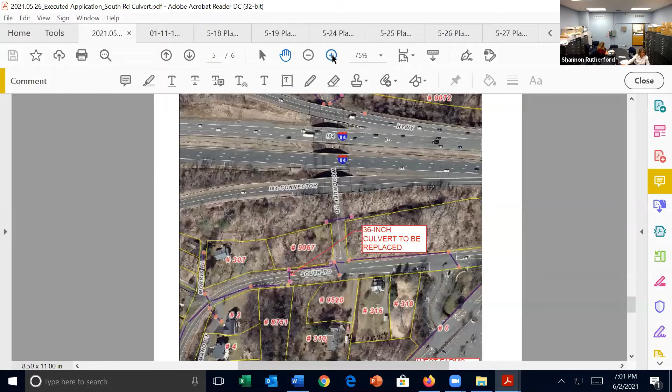I think that's what you have up on the screen right now. It is, and we have our Director of Public Works, Russ Arnold, on the line with us. Russ, if you want to do a full overview for the commission, I can start with the aerial and then move to the plan at your request. Just let me know. Okay, great.

Thanks, Shannon. Good evening, everybody. As Shannon said, I'm Russ Arnold, Director of Public Works, Town Engineer for the town. We're here tonight to talk to you and explain why we have to replace the 36-inch culvert under South Road near Woodruff.

A little history: back in 2010, the Inland Wetlands Planning and Zoning, when it was combined, approved a plan on lot number 9067 for West Farms Mall, which basically revamped the wetlands at that time. They did a whole planting plan, regrading, and we worked with Malone & MacBroom at the time, who was the designer for that wetland recreation and improvement project. We agreed then to replace the culvert and got permission and approval from the commission to replace it. However, it was a big job, a lot of money, and the culvert was in good shape then—it didn't really need the replacement at that time.

So we're here now. The bottom of the culvert has started to erode, and we've lost about 20% of the bottom of the invert at this point. So instead of having an emergency situation, we're here before you to get permission to replace the culvert. We're replacing it with a 36-inch pipe. We're not changing anything, pretty much keeping the same elevation.

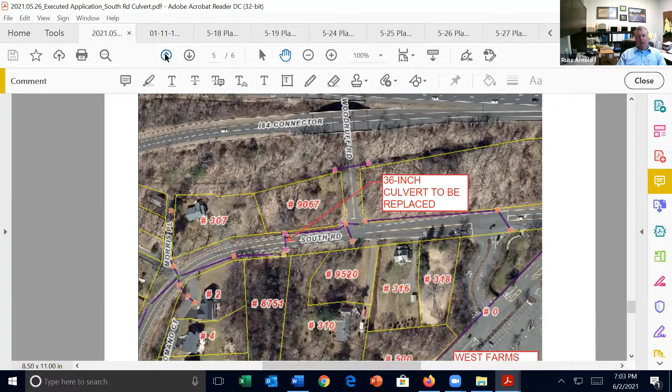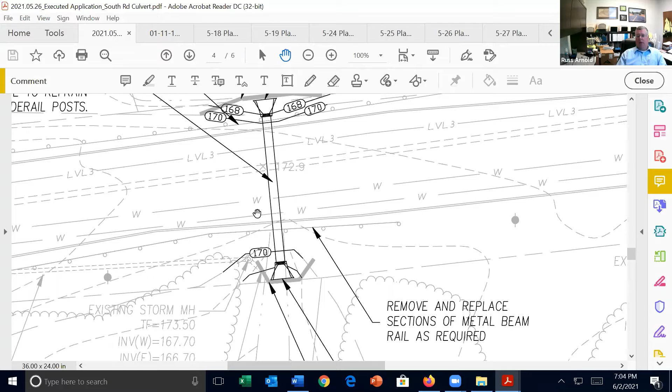We are governed by 3 different utilities. There is a Level 3 communication line that goes over the pipe, as Shannon shows you right there. Below the pipe, we have an 8-inch sanitary sewer with a 6-inch force main that comes from West Farms Mall, put in in '95. Further south, we have a 12-inch water main that goes underneath the pipe, offset underneath our storm culvert. So we really can't lower the pipe or change the elevation too much.

The inlet and outlet run from the outlet all the way down to Hartford Road, Route 171—it's basically about 2,400 feet, with about 3 feet of grade change. The mall years ago went in and cleaned that all out, so it's flowing. So we can't change any elevations; we're governed basically by the outlet and the utilities that are installed now.

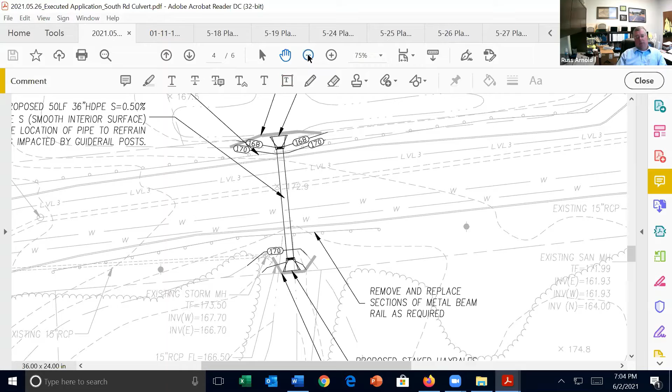We will dewater. Since the roadway carries a lot of traffic to the mall, and the mall's getting back up and open from COVID, we don't want to disrupt that during the day, so we're going to do this work at night. We put out some bids, and we're going to have a contractor with a bigger excavator come in to replace the pipe, along with a crew.

We will dewater prior to construction—during the day our dewatering will involve putting a pipe in on the inlet side, stoning all around it, and dewatering down the pipe itself. We're going to have to dewater during our construction operation because it's a huge wetland with wetland material, and the soil doesn't drain well, so we'll dewater during the operation.

Talking with the 3 different contractors, everyone—myself included—believes we can get this done in one night. We'll pave it the next day with another crew.

Shannon, I'm at a loss—what are we going to put in for our outlet and erosion control? We're going to do hay bales, and if needed, straw wattle here at the outlet. And with the dewatering, we'll use a filter bag. Exactly, thank you.

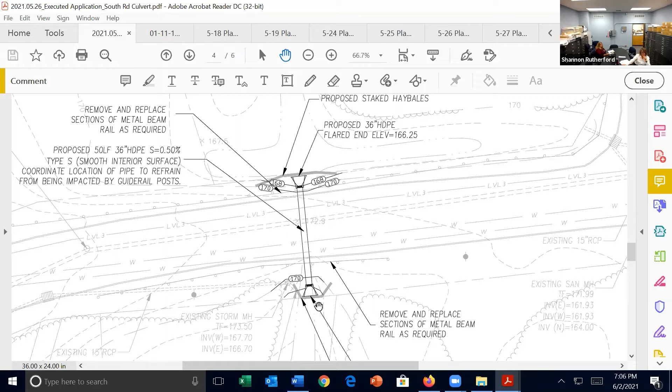And that's pretty much all I have. We're replacing in kind. We've run the drainage calcs back in 2010. There's no reason to upsize the pipe at all. It handles the flow adequately. There's no overtopping, no issues of flooding. It is just a very flat area.

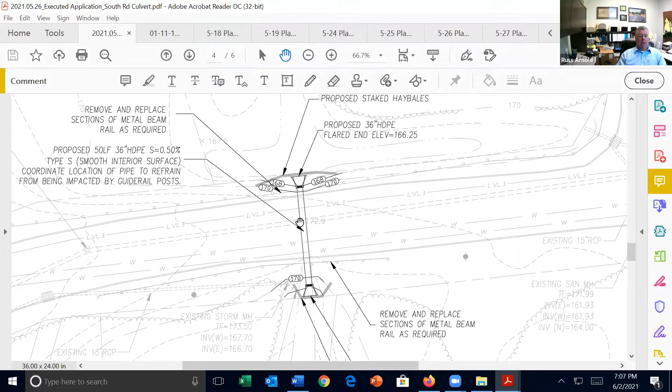This culvert drains from the north side of 84. There's a big wetland on the other side that drains through and under 84 in a 48-inch culvert, about 300 feet east of Woodruff, and that all drains down through this area as well.

So with that, I will open up if anybody has any questions. I'd be more than glad to answer anything.

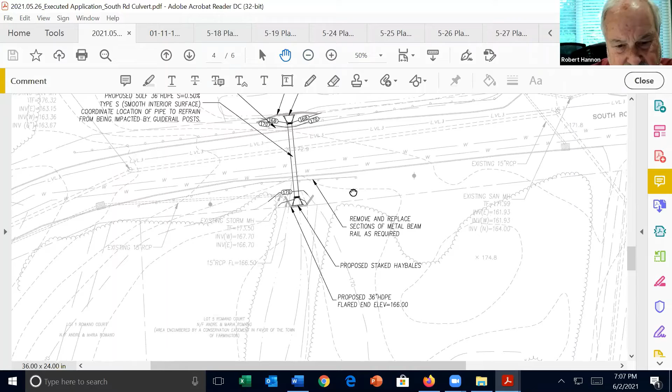Shannon, can you raise the pipe up a little? I just wanted to double check the elevation at the bottom and the top. So there's only a 0.25 foot difference in elevation. Okay.

Rich, I'll start with you. Any questions? No, it looks like pretty much maintenance work.

I did see some excavation that had gone on the south side of that culvert when I was driving by. What was that? Oh, we removed a couple of fallen trees that had fallen down across the brook, and what we were doing is cleaning out the culvert itself because we thought it was plugged up a little bit. But we found that the bottom has basically rotted out. So that's what we were doing there, removing the trees that had fallen into the outlet side.

That's all I have. Okay, thanks, Rich.

Emily? I have no questions. This sounds like action that's needed to stave off further, much larger problems. So there we have it.

Okay, thank you. Dave? No questions. Robert? No questions. Agree that it's routine maintenance, and doing the work will actually minimize the impact on the road. So Russ and Shannon, you are more than capable of pulling off the project. Keep up the communication. That's it.

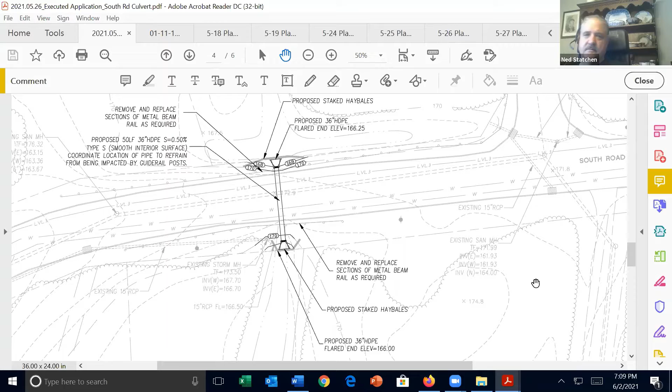Yeah, it seems like necessary work. I don't see any problems. Okay, thanks. Jay? No questions. I agree with everyone else. It looks like just normal maintenance work.

Yeah, Russ, I do have one question. If you guys have been out there, have you seen any evidence of any scouring or anything like that? I know it's a pretty shallow grade, but I'm just curious.

Yeah, no scouring at all. And Rob, basically the reason there isn't any, it's so flat, the water doesn't have any chance to pick up any velocity. Okay.

It's a good thing and a bad thing to be that flat, because we've got to de-water for a long period of time just to get it down, so we don't have a problem when we're excavating. But it's pretty much an ideal situation as far as flow goes.

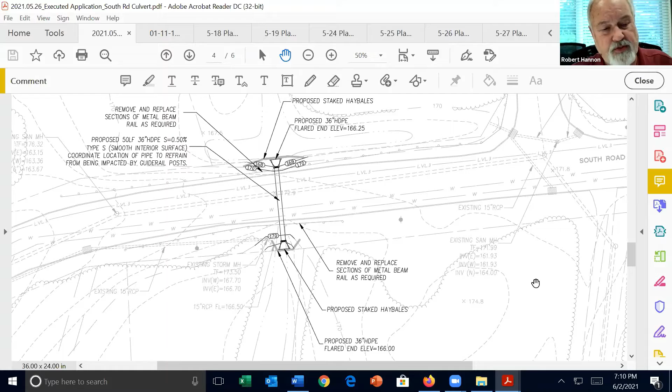Okay, no, because if you saw any evidence of any type of erosion or scouring, I think we probably would have asked to go ahead and take care of that when you put the pipe in, but if there isn't anything, it doesn't sound like it's much that we're going to have to really worry about.

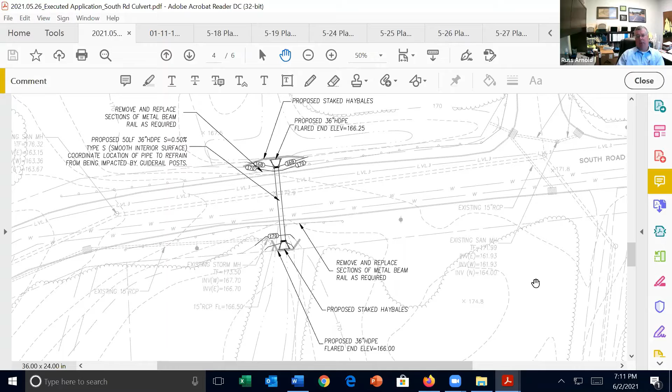Now, one thing we plan on doing, Bob, is we're going to put some riprap in anyway, just to create that plunge pool, just to have it for future maintenance standpoint. Okay, well, it sounds good.

I don't have anything else. So Shannon, on this, we just need a motion to accept the application. Correct. Okay, so would somebody care to make that motion? So moved. Second by Robert.

Okay, any questions, comments? I think everybody's opinion was pretty clear, so speak now if you have anything. If not, we'll go ahead and take a vote. So all those in favor of accepting the application, please say aye. Aye. Aye. Opposed, abstaining? Okay.

And I guess we'll see you in 2 weeks. So I'm going to assume there's no site walk needed. I doubt that it would. I mean, just replacing in kind. I don't think it's really needed.

Any chance the commission would like to entertain a motion with respect to significance then, as both Mr. Arnold and I will be previously occupied at another commitment in 2 weeks. Well, based on comments I heard earlier about this being pretty much routine maintenance, I would say it's not significant, but if somebody cares to make that motion, it would be appreciated.

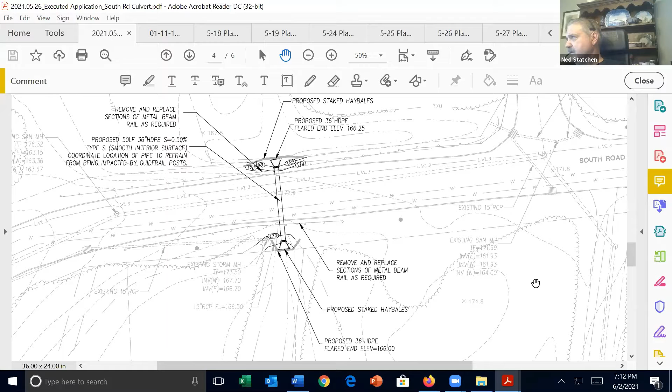I'll make a motion since it's a replacement of the pipe of the same size and basically the same kind, that this is a non-significant event. Is there a second?

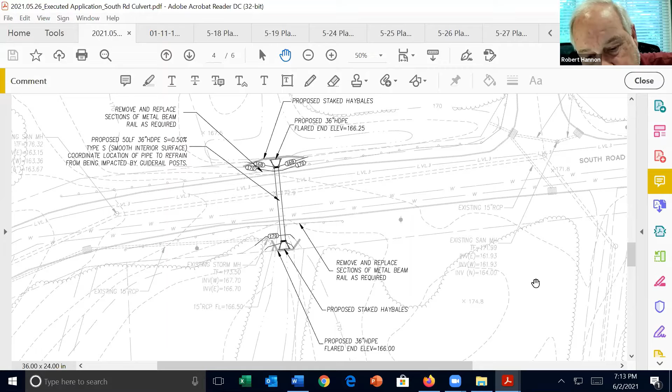And seeing as how people were pretty clear about how they felt, I'm just going to go to the vote. So those in favor, if this is not a significant activity, please signify by saying aye. Aye. Opposed, abstaining. Okay, perfect, thank you.

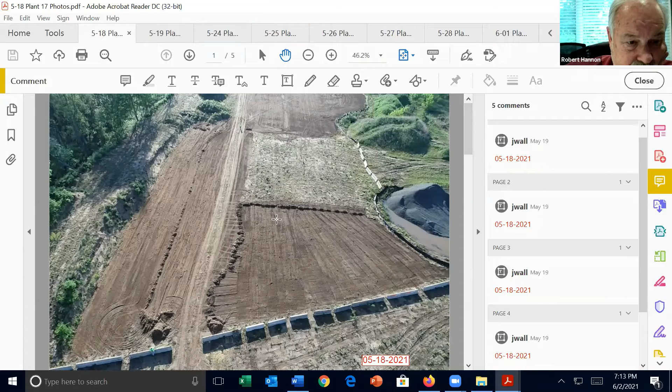Next up is plant 17, 1179 Farmington Avenue, an update. And so we've got photos, and I believe I saw Attorney Galsky on, is that correct? Yes, I'm here with Mr. Majewski. Oh, perfect. So Attorney Galsky, if it's all right, I'll go through the photos, and then if you and Stanley want to give an update after, does that make sense?

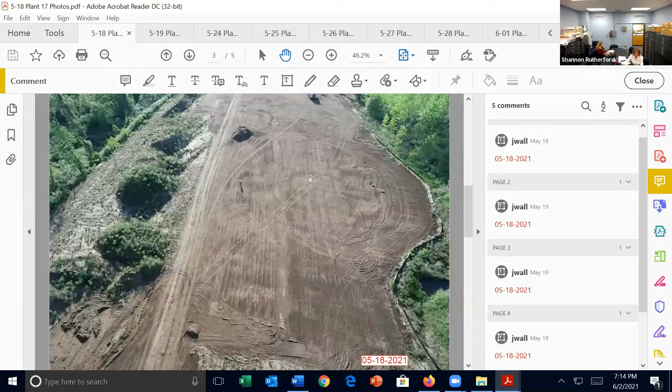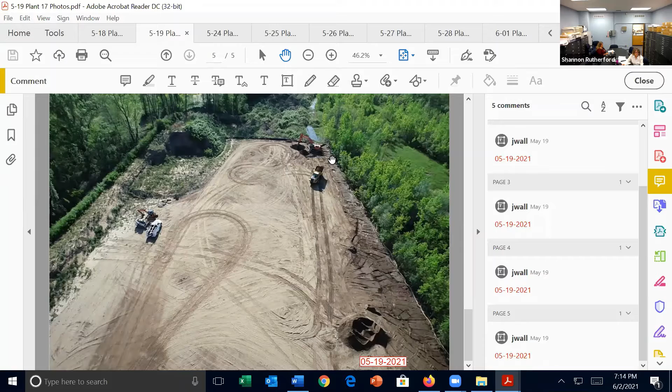Sure, perfect. All right. So some of these I think you folks saw, because we had the photos from the 18th and the 19th at the last meeting, but just from a continuity standpoint, you can see the work that was done. It's kind of interesting to see this progression as we go through. So these are the photos from the 18th, the first week of work, and the same sequence of photos on the 19th, showing the advancement of the work. At this point, they were starting to pull the material back along the edge, you'll recall.

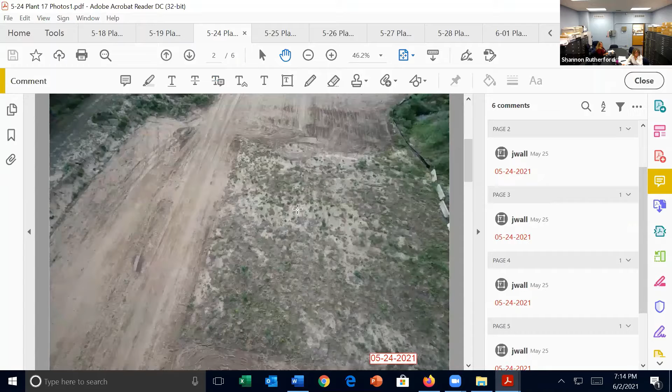And then this photo is from May 24th, last Monday. My mouse is a little touchy, but here they've started to pull more of the material out of the wetland and create that restoration area, and they were starting to get some topsoil in place for the upland and starting to establish the 8-to-1 slope.

This is outside, so these barriers, frame of reference, everything outside the barriers is not regulated activity and work that is not under our review, but the barriers are in place. There's been no amphibian activity in this area, as George has identified in some of his updates.

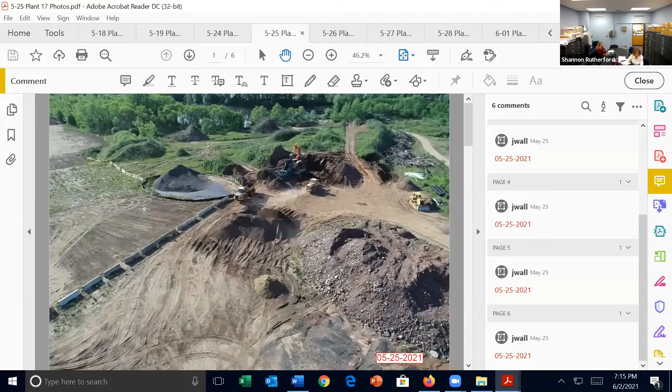And this is another flyover. Again, barriers in place, and then ties right into where the silt fence starts. Right here is wetland B. There's the rest of the restoration efforts going on and starting to get topsoil in place.

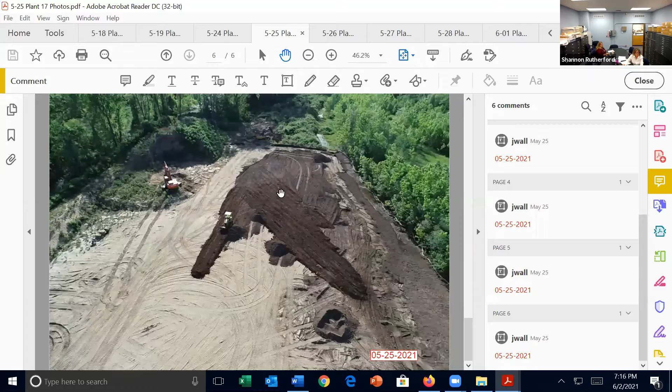Oops, sorry, wrong direction. And then this, they left the embankment where the birds are coming and going, the swallows are coming in and out. It's just some of this material in front that they're getting rid of the invasives that have started to germinate there, and then leveling this out so that it can all be topsoiled and seeded and receive all the soil amendments.

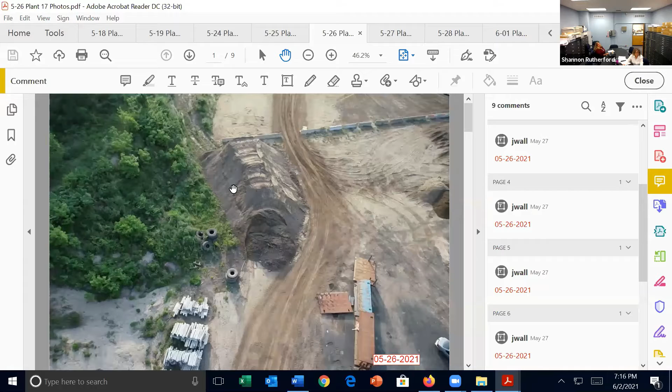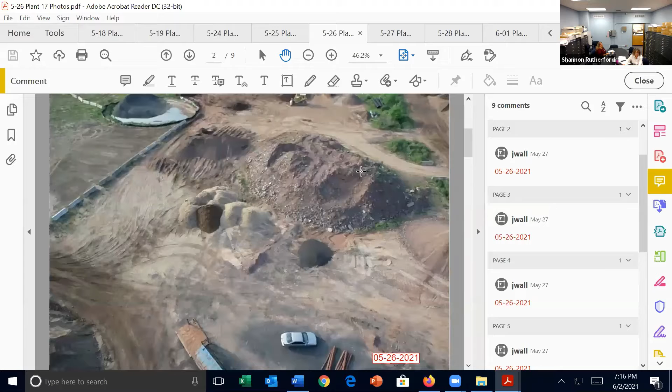This is some of the clean stockpiled material. And then there's another pile that's off the screen that has the material with the knotweed and black locusts, etc.

So they're starting to advance this access road that was on the plans to come around. This is the edge of wetland A in our restoration area. And then this is the inundation area to the east where we did see some tadpole activity.

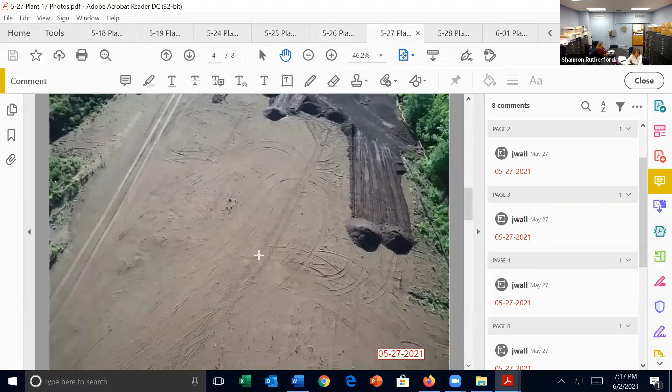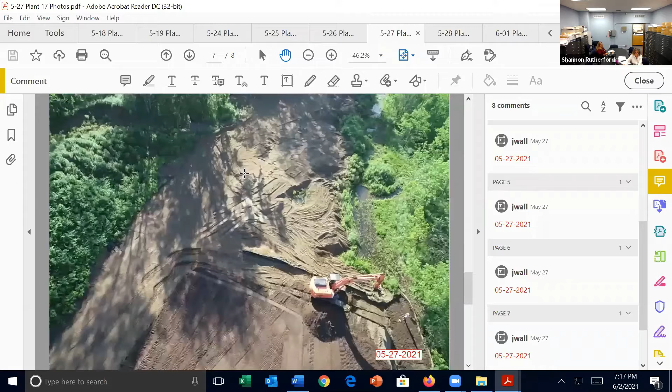This is after some rain, so this is the 27th—I gotta get my dates here—I think last Thursday. We had some rain last Wednesday and Thursday morning, so there's some rain and standing water in there. It's definitely doing its job. We hit the right layer. It's holding water, which is a restrictive layer—a good thing to see.

You can just continue to see the advancement of the topsoil coming through, and the cleaning out of the vegetation and all the invasive species along this area.

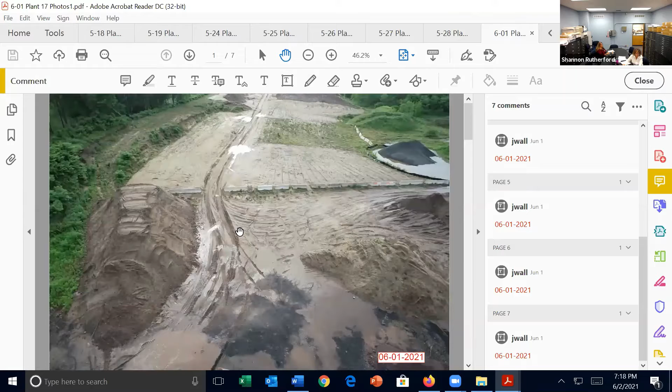And then this is Monday after the rains, the 3 inches of rain we had this weekend. I was out there on Monday. So the access road is certainly draining. It's definitely traversable, and as you head down towards the edge, it's a little less traversable.

They did get the 8-to-1 slope seeded and stabilized. You can see there's a little bit of wash through here that'll need to be worked on this week. You can see the standing water, which again is actually a good thing for us to be seeing in this area. It makes it a little challenging for them to get this area seeded, so they've got to wait for that to dry out a bit before they can get a wet mix in there, the New England wet mix.

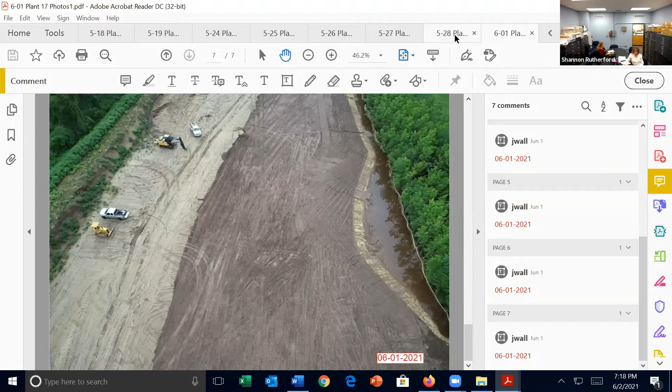So one of the things I did talk to the site foreman about is, in my opinion, we got cleared a little too close to this area that we wanted left alone.

My understanding, and I went back and looked at the plans, I can understand why it wasn't clear on the plan. Hindsight's 20/20. But I spoke to him when I was there on Monday, and I said, as you're coming around, I don't want all this vegetation cleared out. Just clear the access path as you come around.

This did have invasives, so it's probably no harm in the long run. There has not been a breach of the erosion control set up along this perimeter, so no additional material has been pushed into the ponded area. But this will definitely have to receive some of the seed mix coming down for this upland, otherwise it's just going to repopulate with other invasive material.

So we did chat when I was out at the property, and they're going to start to arc around. I have not been out since Tuesday, which was June 1st. We have a meeting set up for Friday morning - Ed is going to meet George and myself out at the property, and Ed will have a chance to review this whole restoration area, the slope.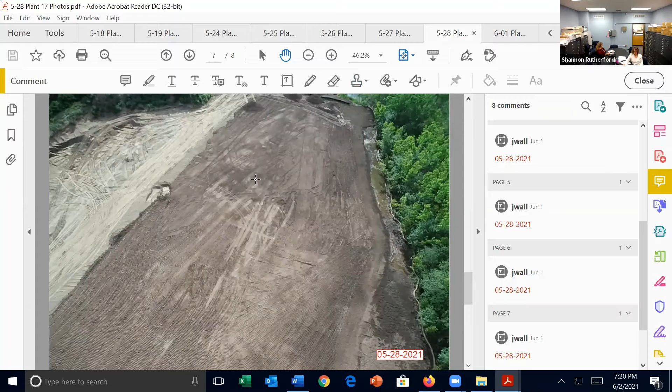The seed mix, my understanding, is coming in next week, so we'll have a chance to discuss that and the soil amendments, and review the work that's been put in place to start the access road in for the wetland creation area on the southeast side of Wetland A. So that's where we stand.

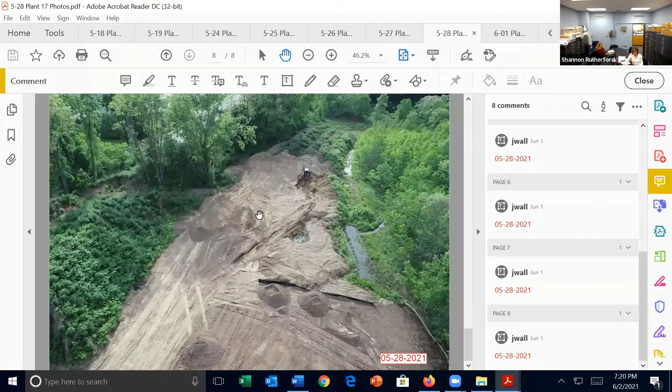And Attorney Galske, do you or Mr. Mirzajewski want to add anything to this at this point? No, Shannon, you went over the progress extremely well, and with the pictures.

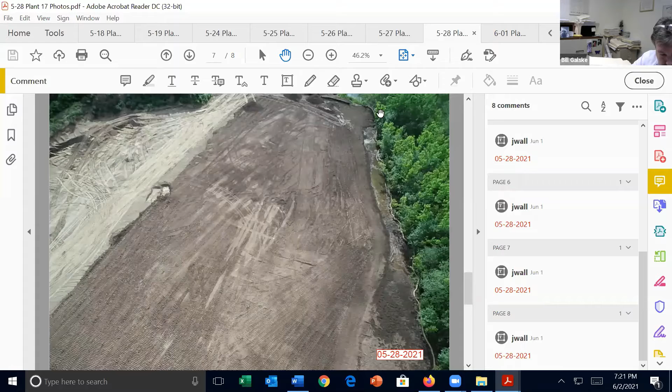Just to update you on what's happening in the very near future, we do have all the seed mix. We're waiting to finish, like you said, for the basin or the wetland area to dry out, and hopefully Friday or the beginning of next week we'll seed that.

And we anticipate finishing all the topsoil by mid next week, and we will hydroseed that whole flat area no later than Friday, weather permitting. Okay, Friday of next week, right? Right. Maybe before, but definitely by Friday we'd like to have that all seeded.

And that will be this area that's on the screen, is that correct? You're not, because the access road will be left for now, obviously, so that we can get into the creation area. Exactly.

We may topsoil the other side of the access road if time permits. Otherwise, we'll catch it the next time we seed the access road.

And the plants are ordered, they're in stock, and we will have all the plants delivered next Thursday in anticipation of starting to plant immediately thereafter. Okay, for the wetland creation area, correct?

With the wetland creation area, I believe there's some plants also in the restoration area. Yeah, I believe there is. So by next Friday it should be seeded, hydroseeded, with the exception of the haul road and maybe the piece north, and we will be starting the plantings shortly thereafter.

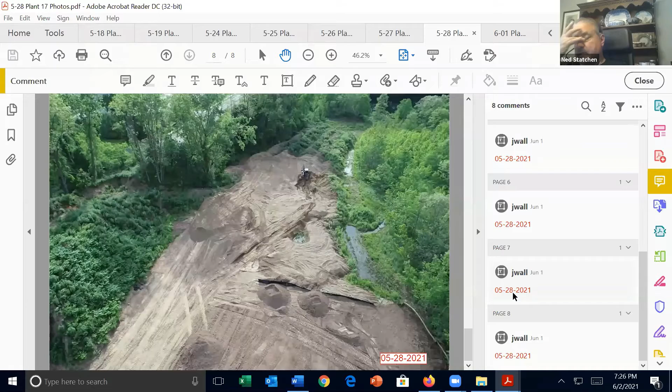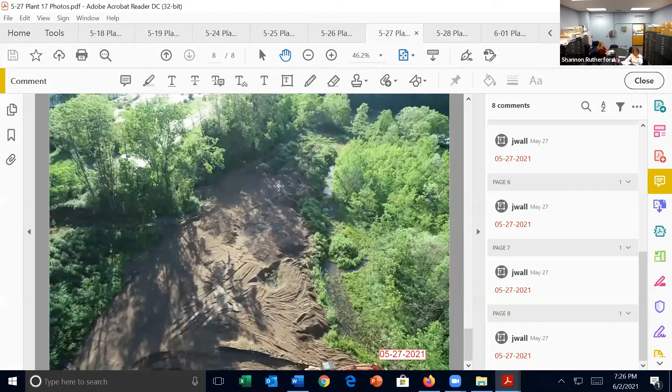Everything looks good. I'm curious as to when we think the starlings will be safe to find new homes. I've talked to George - it's not showing up on this picture, but George says they normally move out in August. So this area is fine. Like I said, they just pulled the material back, but it didn't bother them at all having the equipment there. They're still in and out doing their thing, but they should be finished - their nesting season finishes in August.

I don't have any questions. Just looks like it's really coming together very well, so that's all I have. I don't have any questions either, but I'm happy to see how things are progressing. That's a good sign for everybody. So I think that's it.

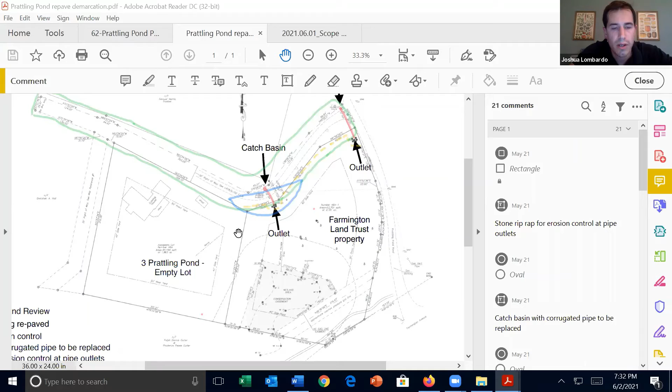The length of the road is 775 feet. It's 18 feet wide in most sections, and in other sections it's 16 feet, but for the most part it's 18 feet wide. We're planning on basically replacing the drainage like with like, and if we need to replace the catch basins themselves, we will. Hopefully it's just the tops and the pipes themselves.

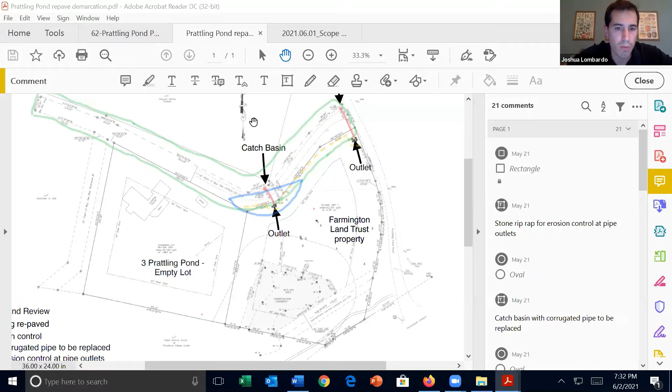I did speak with the Farmington Land Trust and got prior approval from them. I was on a Zoom meeting with them 2 or 3 weeks ago, and they gave me their approval. They also had their engineer and steward, Steve Nelson, come out and walk the site. I'd also been working with Bruce Sear for the last couple months, and he came out and walked the site as well. I believe that's basically the gist of it.

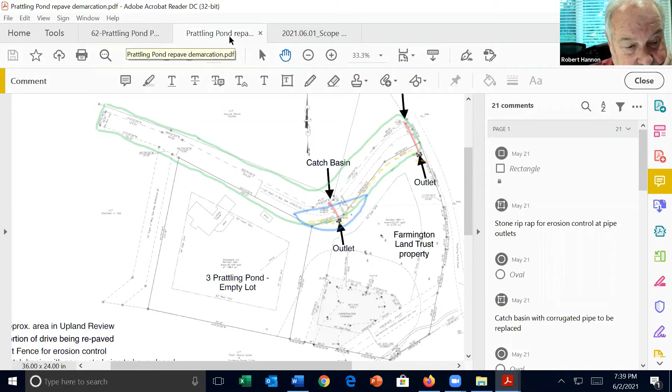Next up is approval of the minutes of May 19th, 2021, Inland Wetlands Commission meeting. Is there a motion to approve? So moved, Statchen. Second by Robert. Any questions, comments, corrections?

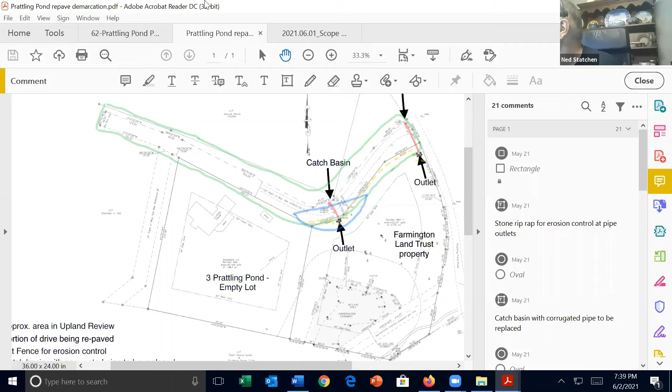Hearing nothing, those in favor signify by saying aye. Aye. I'm going to abstain because I missed that meeting, but I am feeling much better today, so thank you. This is good news. So I guess we can actually adjourn wetlands at 7:40

So next, planner's report. The only other item would be, I know Jay has expressed interest in attending the Farmington mid-year conference, so I've got it up on the screen. It's online, Saturday, June 12th, from 8:45 to 1:30. Somewhere along here, there's an agenda. Click here for details, let's do that. So there's a workshop: the importance of recycling during the waste crisis, Wetlands Law by Janet Brooks, and the Vernal Pool Monitoring Program by Ed Pollock are the topics for this event.

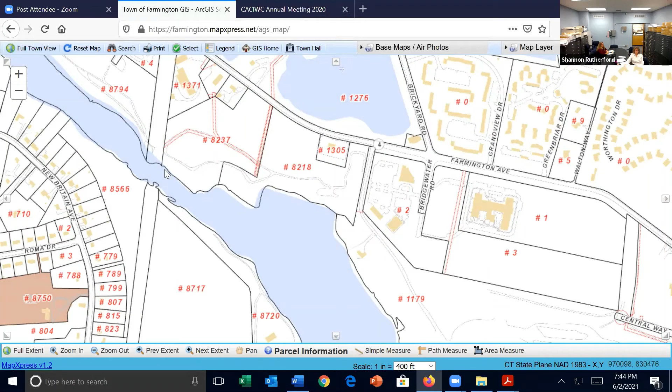So my understanding is the actual wetland soil, be it poorly drained and very poorly drained soils, are limited to really the perimeter, and then there's a pocket. Let's see if it shows. Yeah, it does show in the aerial. There's a pocket of water here. So the very poorly drained soils are pockets of them here within the property.

What about alluvial? There are larger tracts of alluvial soils. There are. And I haven't seen a full delineation. I don't have the full report. I don't have any of that. So that's, I can't tell you specifically area-wise and how much.

And obviously the town of Farmington has already been through, and these soils are clearly going to be heavily disturbed already because the town sewer trunk line is through here. So that's this that you can see. So the sewer trunk line has already gone through, and the dynamics of this being floodplain soils has changed with the introduction of the bridge.

Because let's see if I can get my map layers on. You can take a look and you can see the FEMA line, right? So the FEMA line comes all the way up here into the ball field area and the parking for the ball field, and the bridge acts as a throat to that. And so it drastically restricts that flood and even the elevation. So your base flood elevation here is 182, and your base flood elevation down here is 175. There's a noticeable change that takes place as you come through under that bridge crossing.

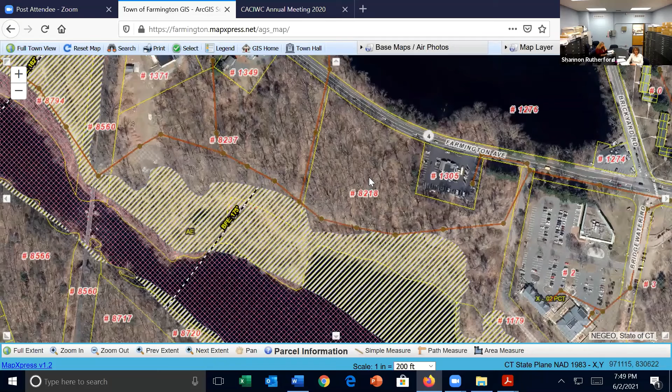Thank you. Certainly. The other thing, I guess, is if they're coming in 2 weeks, assume that's the scenario. Correct. That gets us into August and we don't meet. So we're going to need an extension from them, aren't we?

So I think depending upon how the conversation goes next week, and depending upon where the commission's concerns lie, they may request the commission make a determination on significance and the decision to hold a public hearing in advance of doing the site walk, based on the information that gets shared and discussed next week, which would allow the public hearing to open in July. And then I'd have to take a look to see whether or not we wanted to push for the first meeting in July.

I believe it can be done because we get 3 weeks. I actually, because my vacation ties right into that, so I actually was going to be coming back and not right into a meeting. I've got a week before we've got to prep for the July meeting.

It's one of those times where we get 3 weeks between meetings rather than just 2. So they may make that request so that if the commission thinks this is going to warrant a public hearing based on the work being requested, they may opt to try to get the hearings started in July. And if we need to go into hiatus in August, then so be it, and finish up in September.